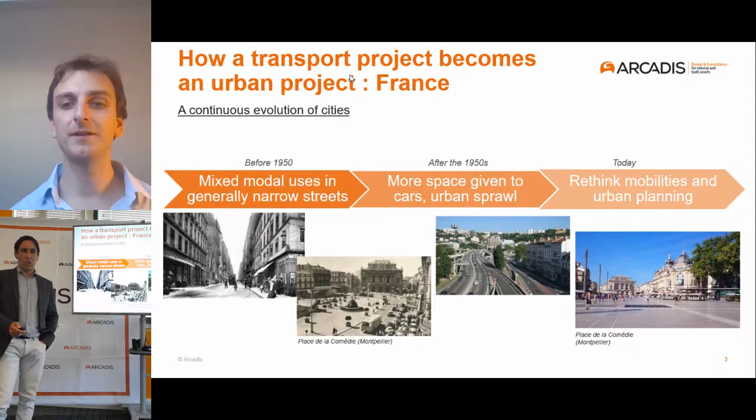But from the 50s onwards, urban sprawl has led to the creation of expressways with access dedicated to cars, a transport mode that was seen at the time as affordable, efficient, and convenient. The newly created bridges and tunnels were planned to provide fast and reliable access to city centers for cars. And the last image shows that today, cities are facing congestion and pollution, seen as a big problem caused by cars. This challenge pushes planners to rethink mobilities and urban planning, including the review of tunnel functions.

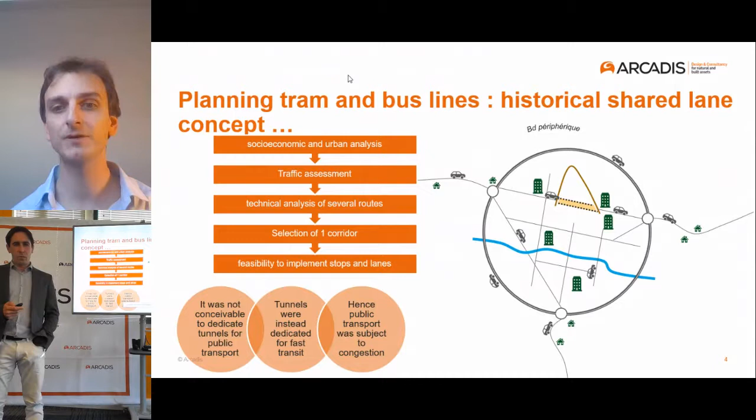In the previous decades, it was not really conceivable to dedicate tunnels to public transport. Tunnels were instead dedicated to fast transit, giving fast access from the suburbs to the city center. Therefore, when a new public transport line was created, if it was not a metro, it was mostly subject to congestion. Next slide.

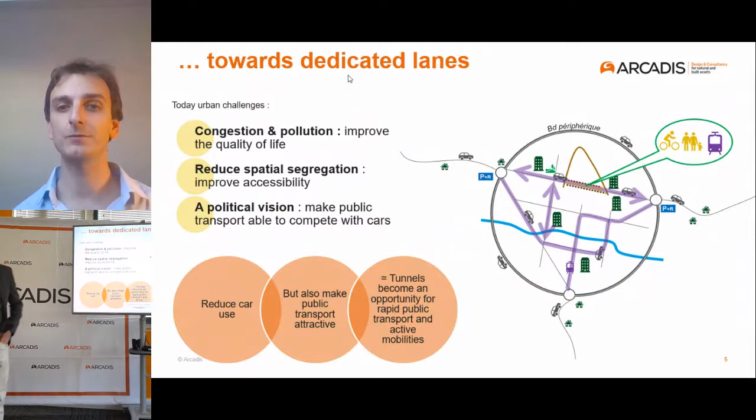But today we're in an era where it's possible to consider putting public transport on dedicated lanes. Why? Because there are urban challenges today. First, congestion and pollution; it's a big challenge to improve the quality of life. The second challenge is to reduce spatial segregation, so it's important to improve accessibility in the city and through movements. And last, a political vision to make public transport able to compete with cars by providing a transport offer.

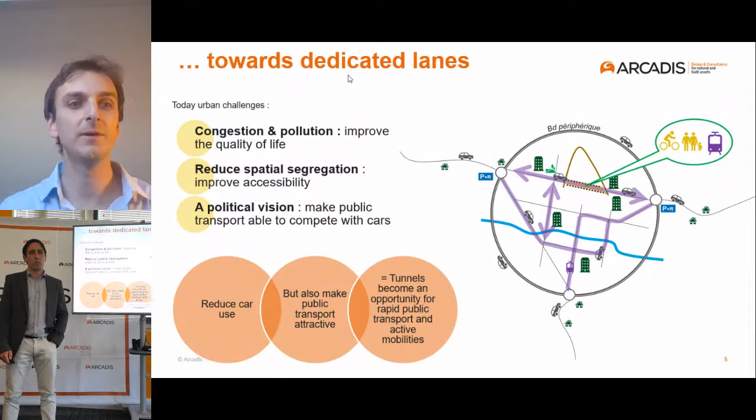So today, there is a new paradigm: reduce car use by reducing their share in public spaces, but also make public transport attractive, a credible alternative. For that purpose, to provide efficient public transport, tunnels become an opportunity. Then I'll let you go back to your presentation, Guillaume.

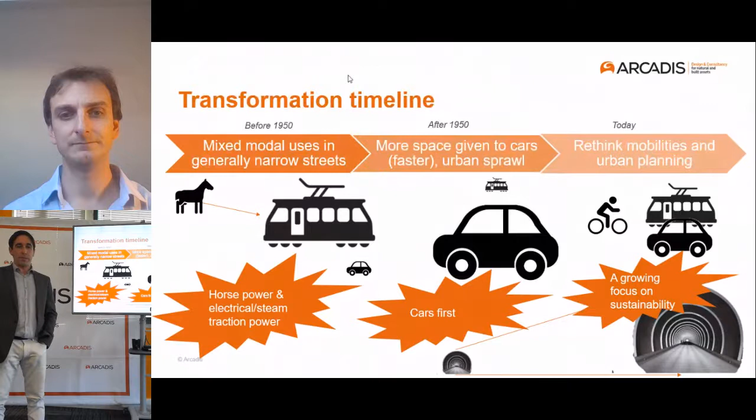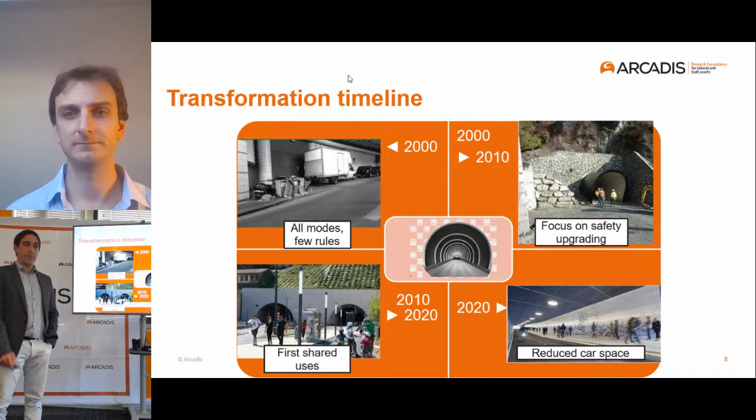In the first period, before 2000, tunnels could have some informal uses beyond fast transit, as parking space or dumping sites, sometimes illegal, especially in urban tunnels. Cyclists and pedestrians could use them; it was not formally forbidden to them. Anecdotally, tunnels could serve as weather shelters for bikers putting on their rain clothes.

In the second period, after 2000, tunnels were upgraded on safety. For safety reasons, the regulator restricted traffic to cars only, forbidding pedestrians and cyclists, with an increase in tunnel safety equipment, structural civil works, and supervision. In the case where two modes of transport follow the same corridor, the selected option was to segregate them in two different infrastructures, like a tramway in one tunnel and cars in another tunnel, as on the right with the Jenner tunnel in Le Havre.

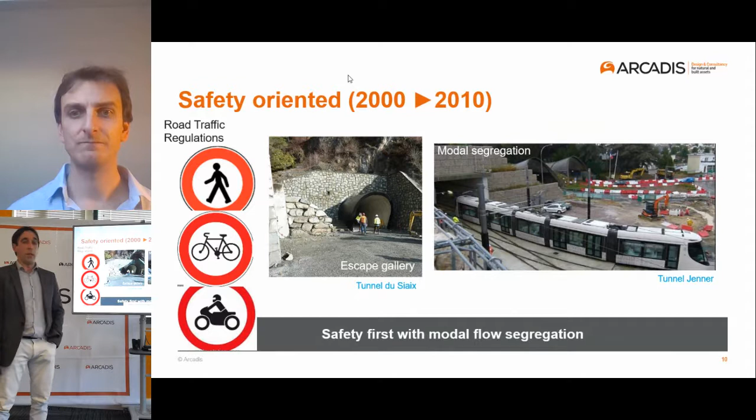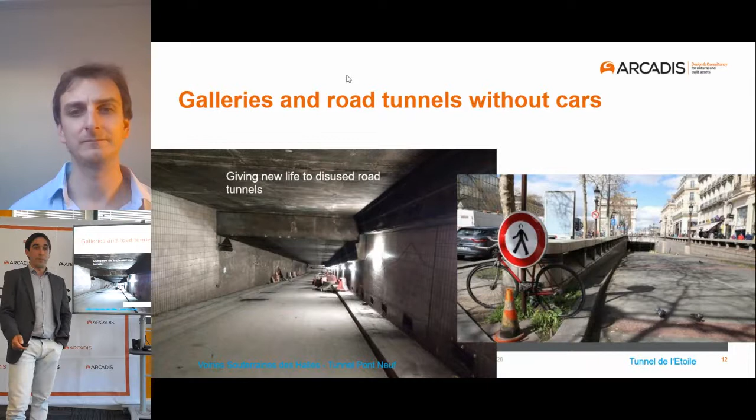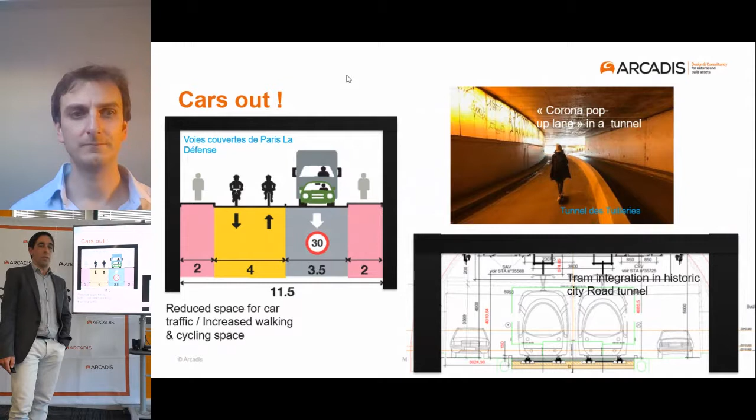Some contemporary projects led to the conversion of existing tunnels into multimodal infrastructures. The car function is kept, but its capacity has been reduced to give room to other functions: cycling, walking, public transport lanes. On the top right is a photo of a Paris tunnel converted into a corona pop-up lane after the COVID-19 first lockdown. It's still supposed to be a temporary solution as of today. To conclude, Antonin will present the constraints involved by the insertion of public transport in tunnels.

Okay. On this slide, you can see an example of a conversion of a road tunnel into a tram tunnel. It's in Montpellier in South France. Line one of the tram is reusing a former tunnel that used to be dedicated to cars. But you can see on the photo on the top right that not every motorist has understood the modification.

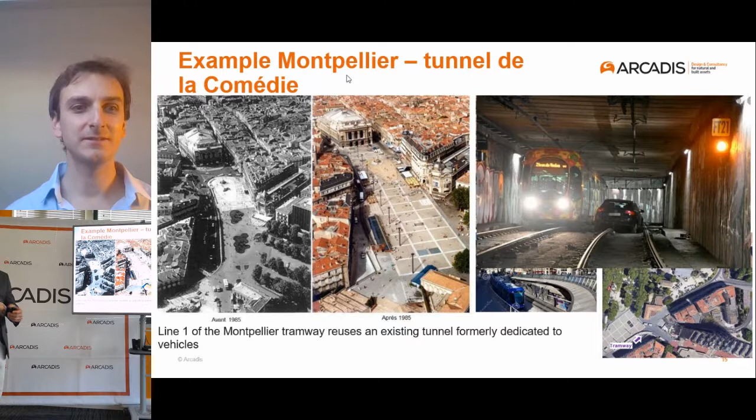Next slide. Here we are presenting the constraints involved when we are inserting a new tram line or BRT line into an existing tunnel. The impacts of the insertion are the following. First, the tunnel gauge and the implementation of the overhead contact line. It's made of the structure gauge, for example, the space in which no moving or static obstacle is allowed. It's 7 meters for a bus and 6.5 meters for a tram, and in height, it's 4.10 meters.

You can see that it's larger for a bus than for a tram because the tram is guided, so it's more secure to follow the track, whereas the bus is driven by a driver, so it needs a larger space. And the gauge may impact other functions. If we want to insert this transport mode in the tunnel, it may involve the reduction of the number of lanes, for example, or even a full way. So this has to be analyzed in the first place.

Then there are the fire rules and evacuation rules that may have to be reviewed if the tunnel functions are changed. A bus rapid transit line and trams carry more people than private vehicles within the tunnel. And last, modification to the existing infrastructure and networks. A detailed analysis is required, for example, for the draining or the electricity, according to the position of the track, because if the track is put over one of these networks, they may have to be diverted to the side of the track in order to make them work correctly.

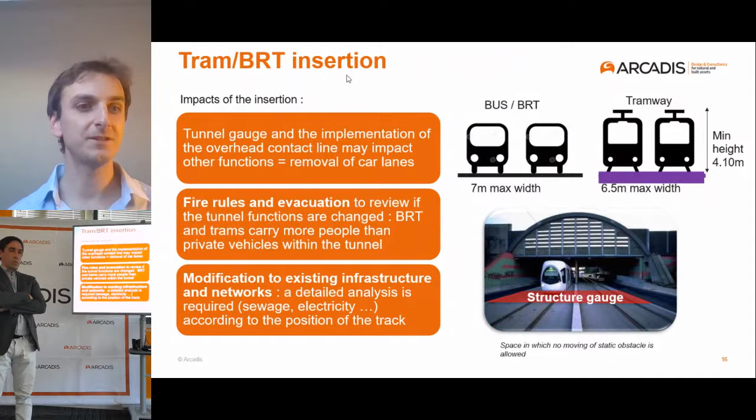There is one question related to contacts at Arcadis: who from Arcadis is working on these new innovations tackling congestion and pollution in tunnels? But I would add a second one to enlarge the scope of the discussion. Can you give us some precision: are there main rules and constraints when a tunnel is used both for road traffic and other transportation modes? Does it raise new issues? Are there specific constraints?

How do you tackle that? Okay, for the second question, I let you, Antonin, answer. The constraints are not exactly identical between the modes. The rules to be applied to these different modes are different, and there is currently no regulation for mixed-use tunnels. But the minimum height for a tram insertion must be at least 4.10 meters to insert the overhead contact line. If the tunnel is smaller than 4.10 meters, it's a small tunnel.